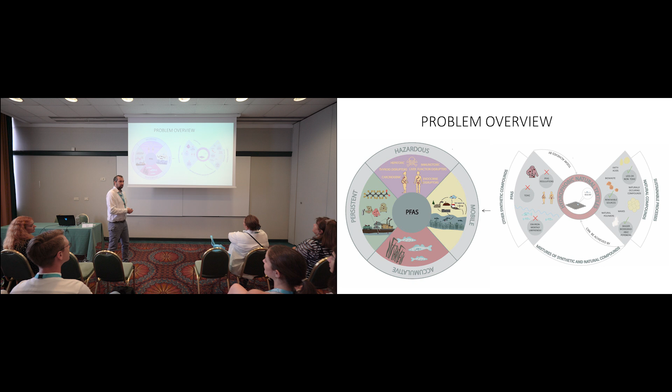Problem overview. So the problem is that recently PFAS was recognized as a toxic and hazardous compound, and basically it's everywhere. And this is our mission as scientists. We always tackle problems, and sometimes the problems are based on the need for a solution. So in ProPlanet, we propose a natural-based substitute based on biopolymers, renewable sources, and so on, to make a hydrophobic coating for textiles. PFAS can be used for different applications, but to be more focused, textiles account for 50% of the world's PFAS use.

So you always have to think, okay, why do you choose nature? Some examples of hydrophobicity in nature, you all know. Nature is that good as part of millions of years of evolution, so can we repeat it? This is my way of telling you that nature still beats us at this point. The lotus leaf, bird feathers, butterfly wings are all very hydrophobic. So what is our goal? What we did most of the time is measure the water contact angle of the surface. If the water contact angle is above 90 degrees, it is hydrophobic.

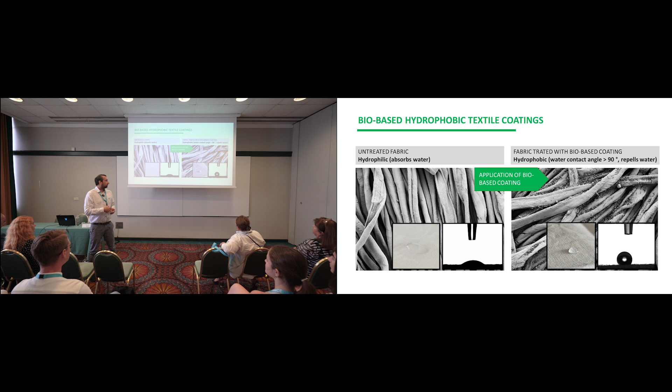How? We try different approaches. The first part of my presentation will give the big overview, the real needs of the industry, and where our pieces come into play. At the end, I will show all the lessons learned through the path. It's not just one experiment and we achieve something; it's a whole learning path. This is where we are now. For untreated fabric, we use cotton as a base. This is our already developed coating under the microscope. You don't see the coating, but it's working. One requirement was that the coating should be very thin, on the micrometer scale. We have achieved this in multiple ways. I will explain later.

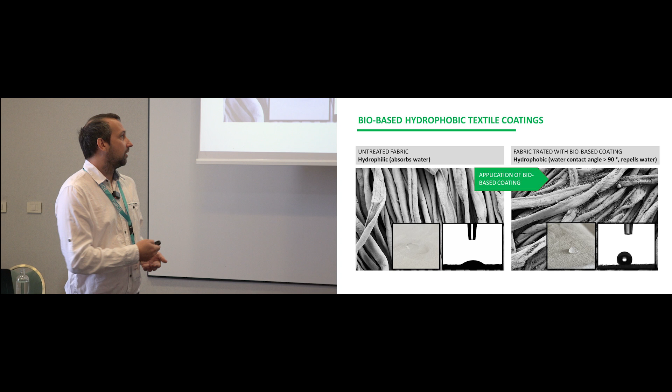We're not tackling all the problems with inspiration by nature, butterfly wings, lotus effect, and so on. So you can forget all the other stuff using PFAS. Let's focus just on the textile endpoint. If I say we're replacing PFAS, we're not replacing it for non-stick cookware, because the polymers cannot take that much heat. So these are our materials that we play with.

Starting with natural biopolymers. Natural biopolymers are not man-made or synthetic. They're made by nature, by organisms, and we are just extracting them. However, we also do some chemical modifications, which by the European Commission's classification do not count as natural biopolymers; it's a synthetic polymer with different parameters. These problems occur when something is very good and popular, like plastic and PFAS. Business is working, we cannot imagine life without it, so maybe we need an alternative. These alternatives are usually pushed by legislation, and legislation, especially in Europe, will be quite harsh towards those chemicals. This is the motivation.

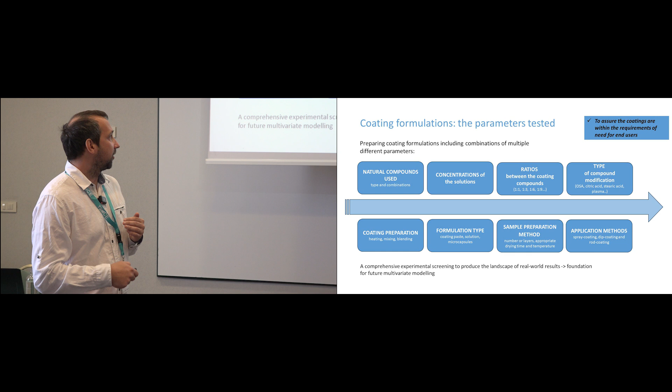This is the formulation, this is how we tested our parameters. I will not go deep, but as you can see, we already try to work with end users in mind, for example application methods, preparation and so on, because everything is evaluated at the end through economy, resources, or toxicity.

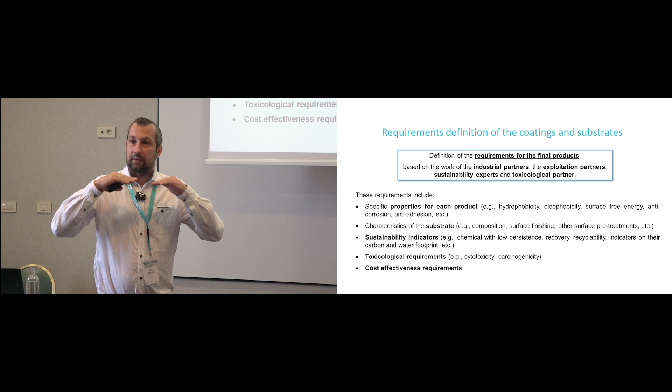Here, for example, this is what we also do in the ProPlanet project. We have defined the properties that need to be achieved by our coatings. And we took into account not just the industries, which probably have their own interest, which is the property of the product, but also that customers, end users like us, are satisfied with the product, so that we can enjoy our life without being wet in the rain and so on.

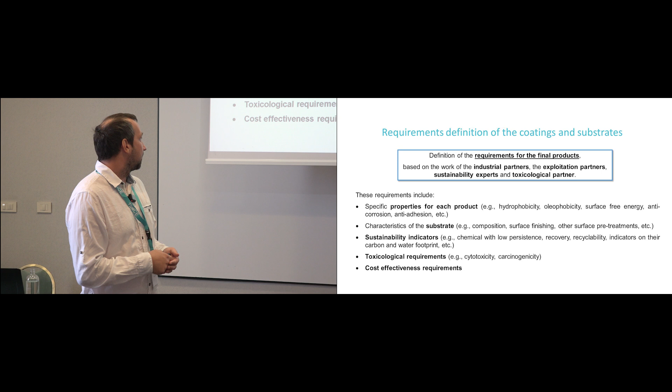Of course, there are also other characteristics: the substrates, sustainability indicators, toxicological requirements, and cost-effective requirements. All these are now being tested on some selected best options that we have. At this point, we are at the halfway point of the project, which is 18 months, so 18 months still to go. So we are now on the way to do the scale-up.

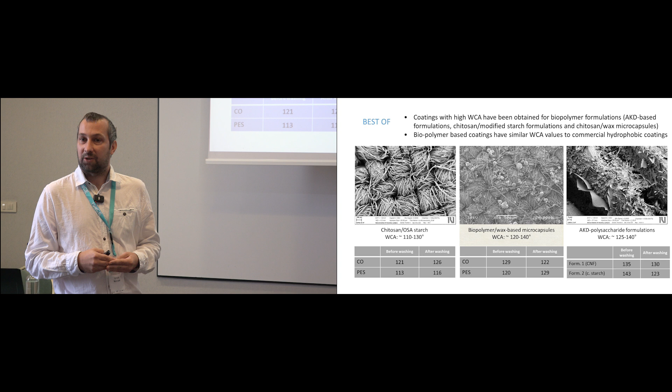Scale-up means that we will come closer to the real demands on the market, and our end user is the company who is producing the coatings for the industry. This is how our best formulations look. We reached quite a high contact angle. We also tested with washing and so on. This is the first test. Honestly, the industry was quite surprised what we can do with just nature-based biopolymer solutions.

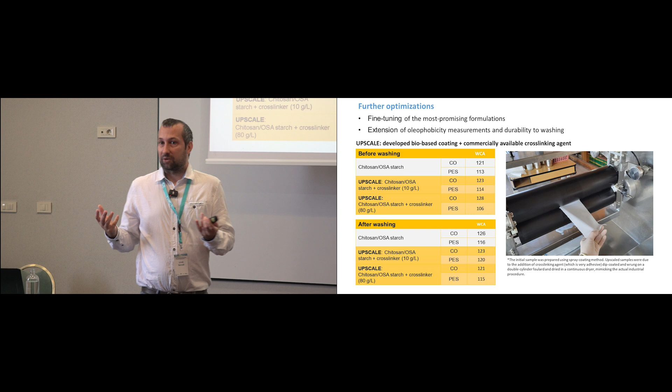And all this has the requirement that the thickness is in micrometers. You have to also learn one trick. If someone sells you a completely natural material, done in the lab from agar, alginate, chitosan and so on, with hydrophobic properties: hydrophobic properties also come when the material is very thick, which means the water contact angle per se is not the right method to measure. Maybe dynamic contact angle and other measurements will be tested. I will show it later. So this also needs to be counted.

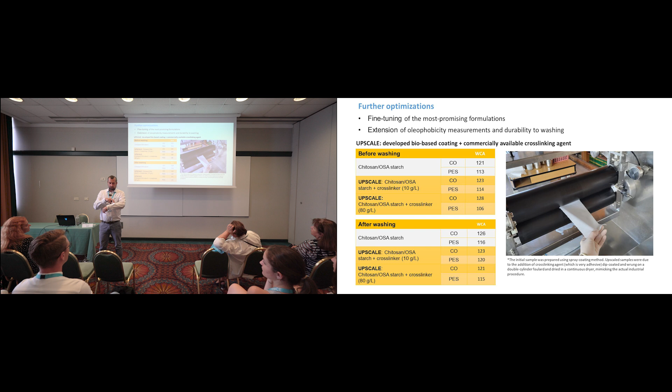What I want to point out is that we have hydrophobic properties, but PFAS is the only one with excellent hydrophobic and oleophobic properties, repelling both water and oil. In the project, we have to replace it. None of the other commercially available PFAS substitutes have those properties. And when we tested mixtures with one of our selected bio-based coatings, we achieved a little increase in those. So my team is now working on that part. We have achieved this, it's quite good, so we are now working on the oleophobic properties.

This is also what it's now going on. So we really go into details how the industrial process looks like - what are the real requirements on the market. Before, in the lab, I synthesize something, it works, and then you have all those detail questions.

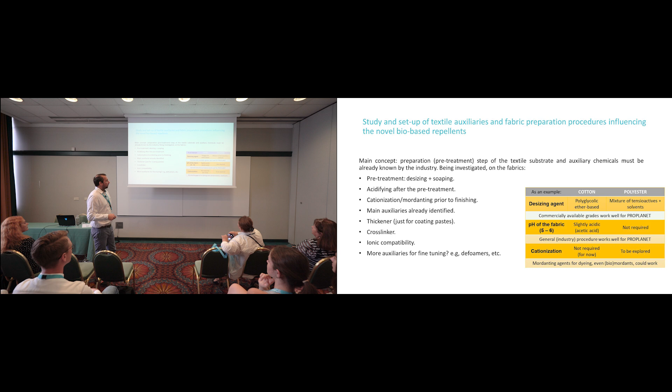So we are working with cotton and polyester as the mostly used textiles. There are also different others, but this is something that is now tested with our coatings. It's not that simple when you go to the market, but more or less this is something I can share with you.

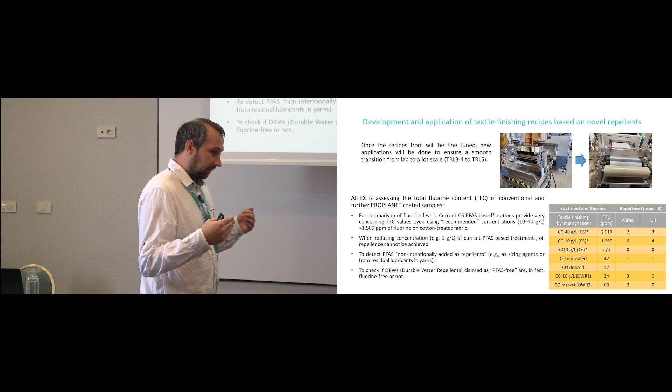So this is the machine that we're using now - it will be upscaled for the coatings. But here it's very important that, based on the legislation or recommendation at this point, the recommended concentration for fluorine is not zero. So basically there are already some negotiations going on that, okay, still some can be there.

And you can see if you measure the concentration of total fluorine content, this is for PFAS for example. These are the recommended concentrations of PFAS, so you have to have quite a lot of concentration. And you can already see if you reduce the concentration from 40 to 1, you're not reaching the quality anymore - the properties are not good enough for the market.

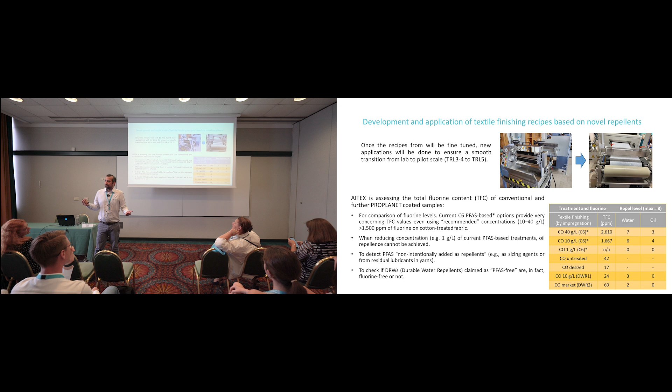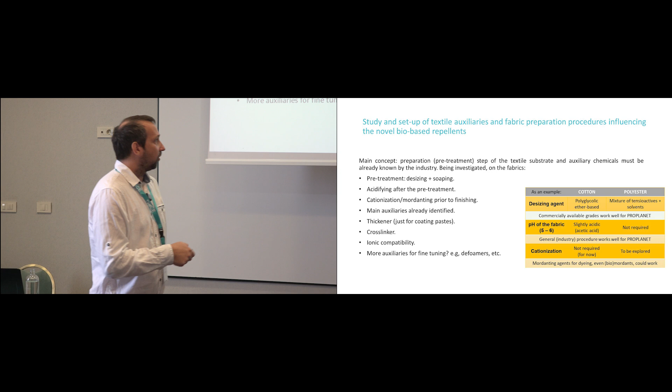What's surprising is that also the pure cotton material that was tested also has fluorine content in it. So more or less, PFAS-free at this point is more or less an illusion, because all the small steps, all the additives I'm showing here, before getting the fabric and doing the coatings, already can have some PFAS in it. And sometimes this also avoids the legislation because it's not requested.

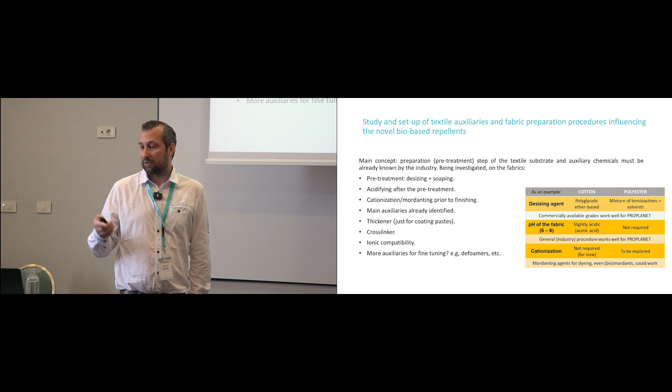So this is the work package, the last one. Here we now have these tests provided by our industrial partners, and we are not complicating with science anymore, but just, okay, this is how the test should look like and so on. It's quite a basic test, but it should work.

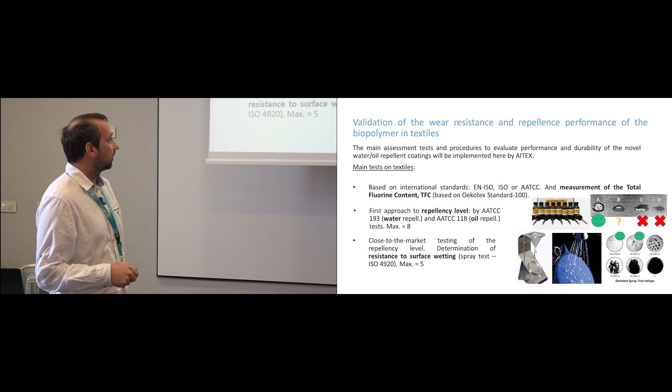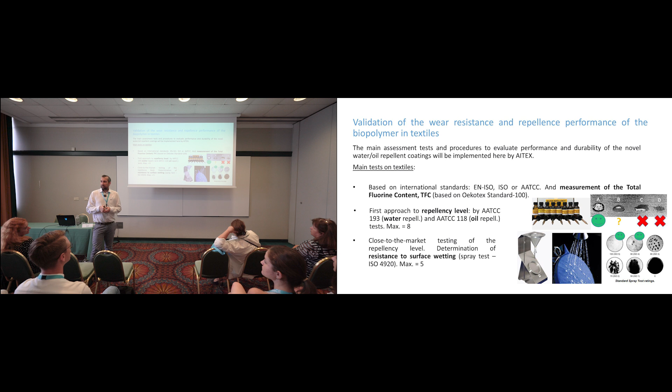This is something that at the end - they're just testing your clothes and something related to it, those are the standards. So all the science at the end is just that we are measuring the drops and how they are retained on the surface. So this is good, this is not that good - basically it's how they feel.

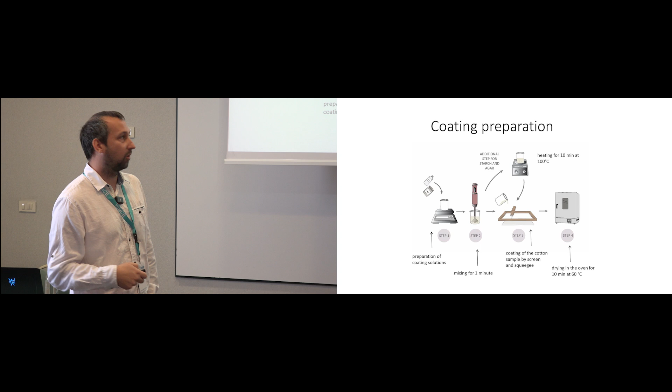So yeah, just talking about the problems, I guess - so it's about the solutions. But yeah, so what are the solutions? In the labs there's always simple ways to do it, we're not complicating things. How to make bio-based coatings? You need those four things - basically you need a scale, you need some mixer, you can do it at home basically. Then we have different options to put it on the textile.

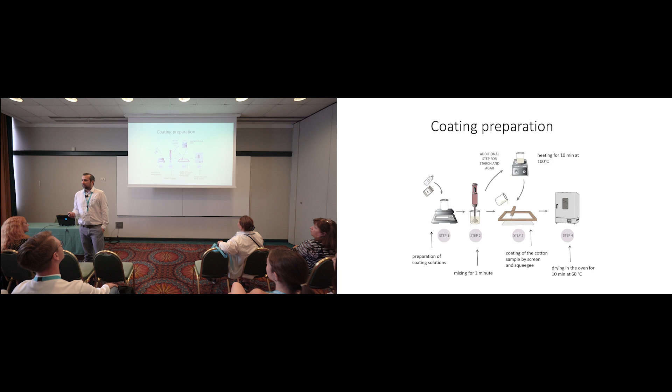I showed before three options, and then also maybe some drying and so on. So it's not that difficult to do a lot of tests. Then there are different types of formulations - for spraying, for rod coating, for dip coating. This all depends on the properties that is needed.

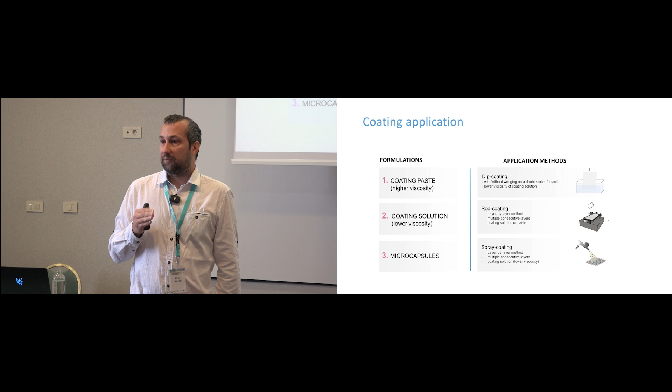For example, high viscous chitosan cannot go to the spray coating, but can go here. This is why we are working with multiple solutions, achieving quite high water contact angles, and trying to fit the specific needs. For example, with dip coatings, it's coated on both sides; here it's on one side. Still, this is all based on standards.

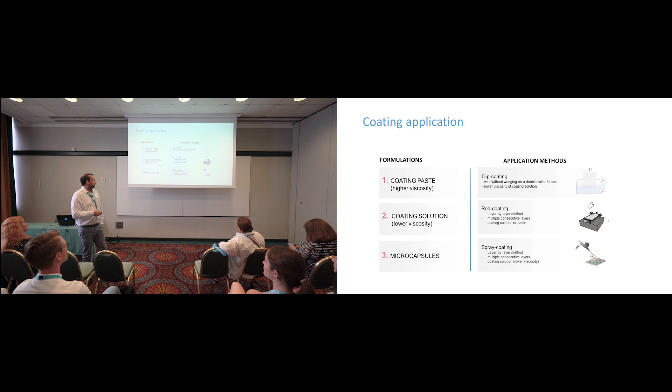So how much time do I have - five minutes? Okay, so lessons learned - I think it was more than 500 different experiments. So now I will go through it more or less just to give the feeling of what my team was doing in the labs, before we came ready to talk with the industry and make a fine-tuning with them.

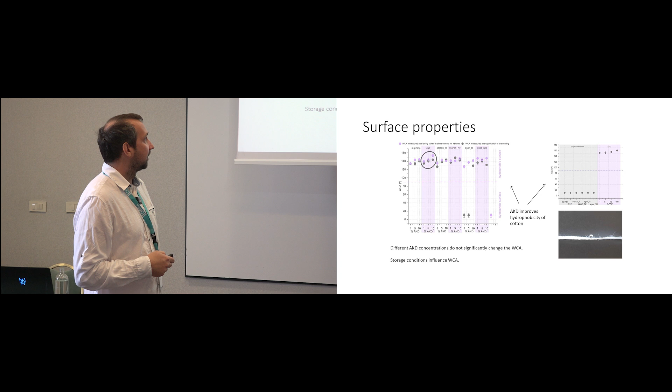Physical properties - here's maybe a very important factor for textile users: air permeability. So how is our coating affected? It's reduced, which is something we can expect since we are doing something on the surface. We are reducing the permeability of air because we are clogging those interspaces between the textile.

This is expected. I think we didn't test it with PFAS, but we also believe it should be the same - it's not something new. Mechanical properties are also very important. I think here it was not much changed.

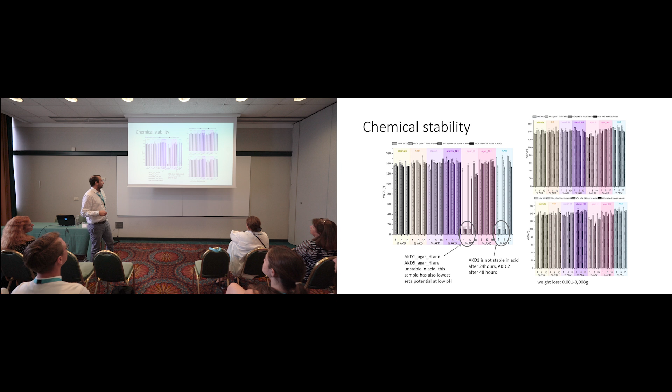Chemical stability - we tested how it holds up in acid. We have great success, the water contact angle stays, except for agar, which is still something we need to repeat and think about where the mistake was, because we didn't expect that and cannot explain it at this point.

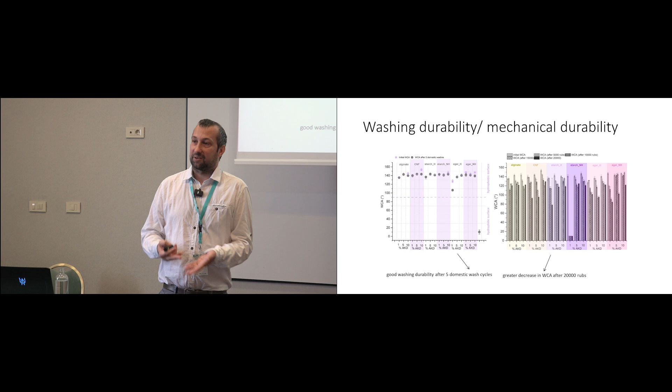And also here, for example, for the weight loss, it's also very minimal, since the thickness of the coating is very minimal. So washing, of course, what we do with our clothes, we wash them, because otherwise it's not good for people. So this is also very important factor. And also here we reach quite a good success.

This is what we are afraid of, but our coatings are still good enough to go to the next round, also going to these tests, also the rubbing and so on. That's my conclusion, so I think I'm on time.

Okay, so people often overlook this simple answer, thinking that only a complicated solution will solve the problem. So why I'm saying this, because whatever we do, what we learn is, if we do not need to complicate, we will not complicate. We will just look for inspiration in nature, what is accessible and on the market already, and then try to build on our scientific knowledge.

What we also did, we will put a lot of papers out from that, so we also bring something to the scientific library of knowledge. And also we are planning to publish all the results that are not good, let's say. Probably will not publish, but still it's not probably accepted as something that will be used, but still it's a training, and we have to bring some knowledge to the society. So with that, I thank you for your attention, and I look forward to some questions.